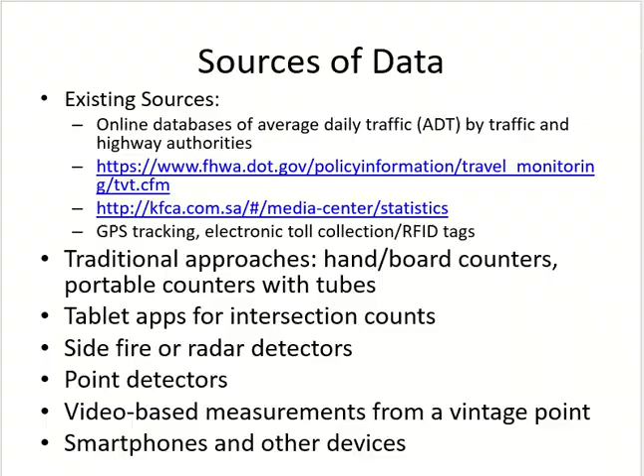If we cannot use one of these approaches, then we have to go in the field and collect traffic data. We can go there and do it manually, or we can put some detectors on the road which will do it for us. Another option is video-based measurement, where you collect a simple video of the highway and later extract the data manually or using software. There are softwares specialized for this.

Where do we use traffic data? For managing the system, for doing future projections, knowing driver behavior, finding out factors which we use in our analysis. Today we will do it for one of them.

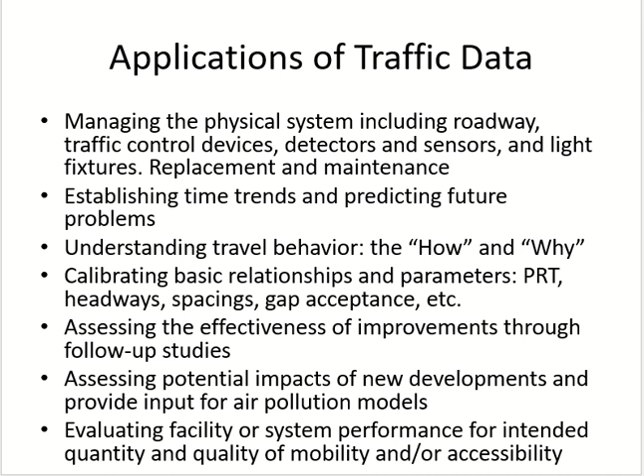Doing follow-up for our changes, finding out the impact of any new development on the traffic, and finding out the current state of the system.

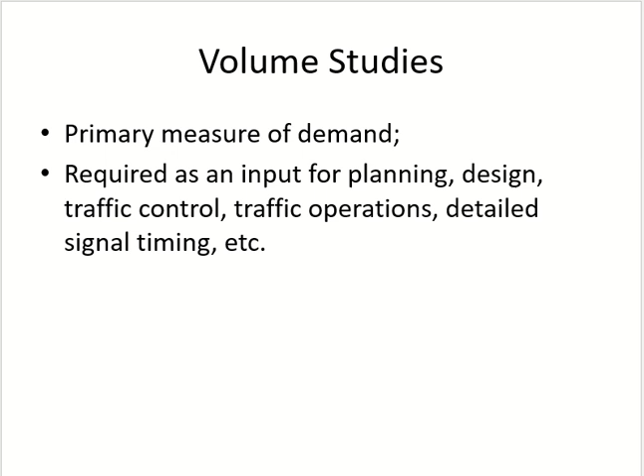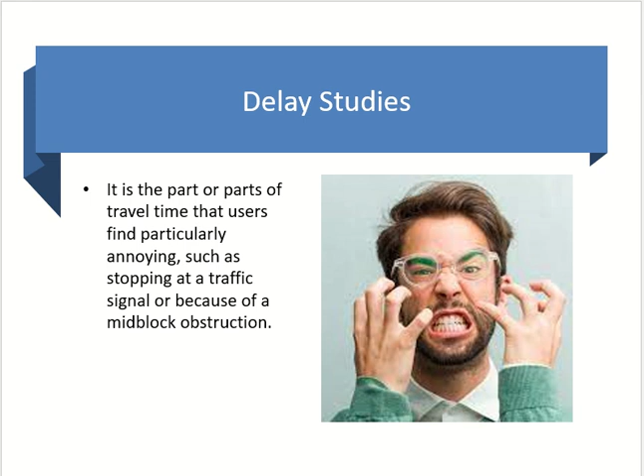These are the types of studies which we discussed very briefly yesterday. Volume is related to demand. Speed is related to safety. Travel time is related to drivers, how they select their route. Delay is how to get people mad. Density is related to driver comfort.

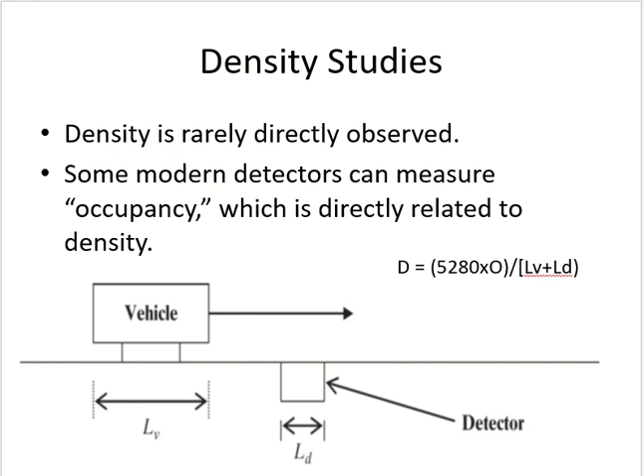We cannot measure density directly, we have to use a detector. In the last chapter we saw some equations in which density can be calculated.

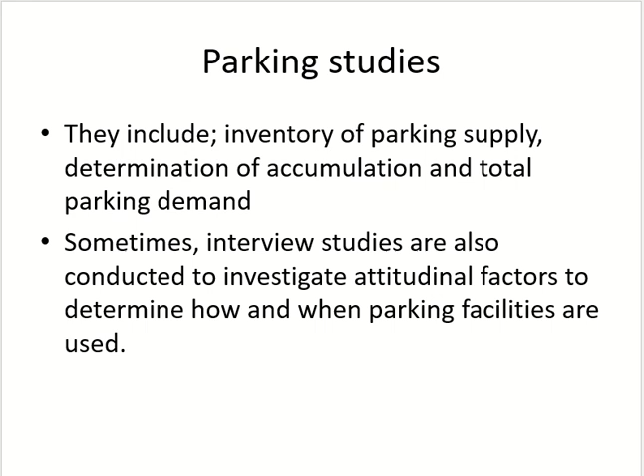Then we have accident studies focused on accidents, and parking studies. One thing I did not mention is that even in parking studies we can do interviews. We can ask people about their choice of location and choice of how they would like to cross the road, pedestrian bridge, or so on and so forth.

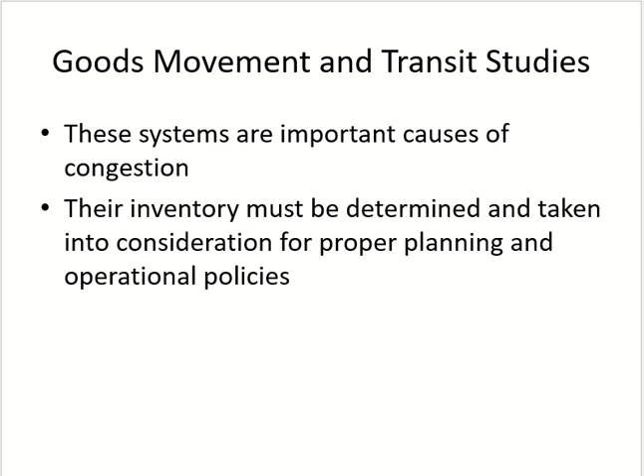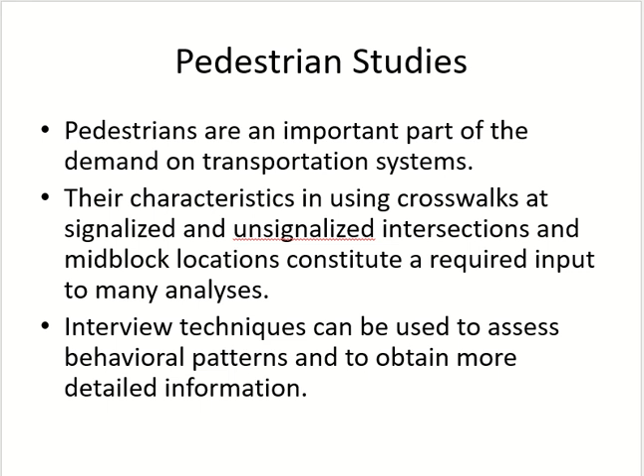The study for heavy vehicles, because they can cause a lot of congestion, which we see normally in industrial areas as well as education areas. Then we have pedestrian studies, and that one was parking studies. Parking studies as well as pedestrian studies include interviews.

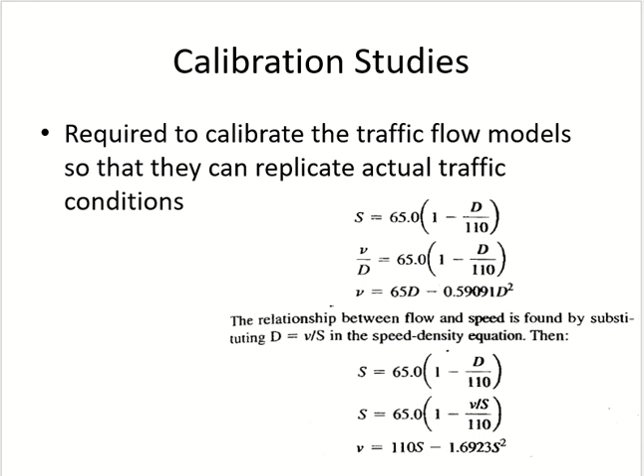We have calibration studies in which we develop new equations, which we did in the last chapter as well. Observational studies is another name for follow-up, where we are following up the changes.

Then we move on to the methods of data collection. We have three types of methods: manual, in which you go and record the data yourself, and the other two involve detectors which will do the recording for you. We're discussing manual methods.

Manual methods have to be shorter, because longer will increase the error and the chances of the person going to the hospital, and you have to keep it to few locations, because more locations means more people.

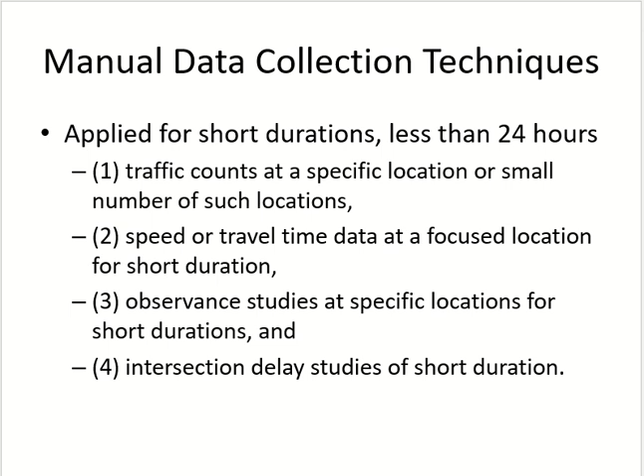What type of studies can you do? You can do counting, you can do speed again connected to travel time, you can do observational studies, follow-up studies, and you can also do intersection delay studies.

We will now discuss manual counting in this chapter, but there are other studies, as I already mentioned, which are done manually, and we will discuss some of them later on.

Here we are discussing manual counting, because manual counting is normally the longest one, so it's more critical and has more problems. Like I told you for the project, you will do the speed for 10 cars, which can be finished in 1 minute. But the counting will be 15 minutes, so counting is related to time and becomes the longest one.

Other studies are usually shorter. But if you want to do any study manually which has a longer duration, the same concept will apply to that study as well. So if you do manual speed studies for longer duration, you have to apply the same concept there as well.

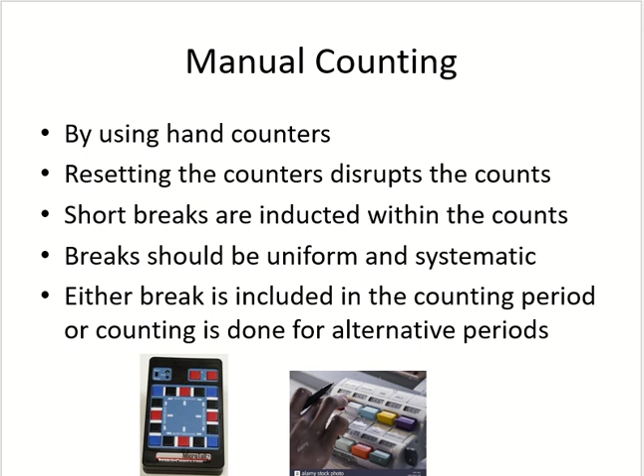Clear? Divide by the number of minutes, multiply by the number of minutes you want. And this is what is written here in this slide as well. But I explain it to you so you understand. It's not an equation which you have to memorize - it's average and cross multiplication. Clear?

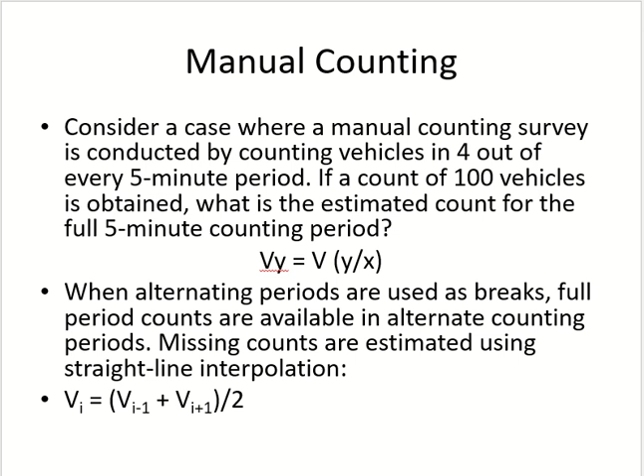No, you will still cry in the exam. At least I can say it was cross multiplication. You will still be looking at the paper. Cross multiplication, yes. This is what happened.

Okay, we have a 4-lane freeway, meaning 2 lanes in each direction. They counted it from 4 to almost 6 p.m. Now you can see the 2 lanes for east and west directions, eastbound and westbound.

Now in each time interval, how many values do you see? In each row, how many values? Not how many columns. How many values? 2, right? In each row there are 2 values, right?

Which means in each time interval they were only counting for 1 lane in one direction. One lane here, one lane there. So they were never counting both lanes together.

Why? What's the reason? The reason is accuracy. When you count lane-wise, vehicles are coming in a sequence - one goes, the next one goes, right? They cannot go together in the same lane. So this increases your accuracy, because vehicles are going one after another.

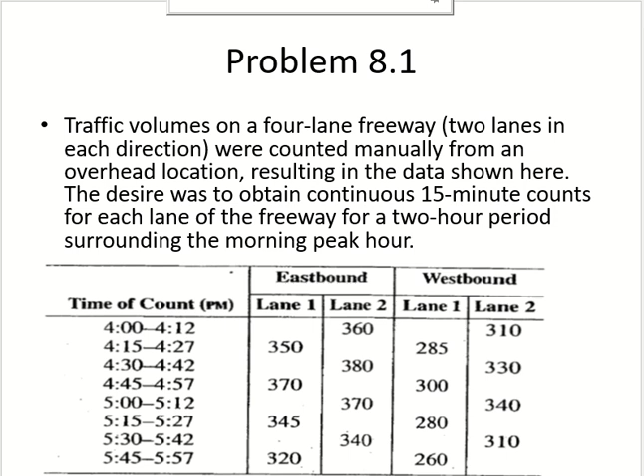So the first thing we need to do in this example is convert the 12-minute counts to 15-minute counts. All these values are 12 minutes, right? We want it to become 15 minutes. So this is the first thing we'll do. Take out your calculators, phones, whatever you use to calculate - you will not bring it in the exam.

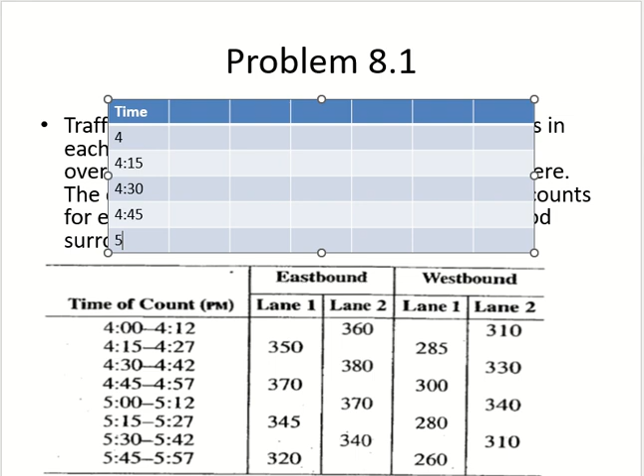Okay, so time 4, then 4:15, then 4:30, 4:45, 5, 5:15, 5:30, 5:45.

Okay, lane 1 for east. Where did I go? Okay, lane 1 for east, lane 2 for east, lane 1 for west, lane 2 for west.

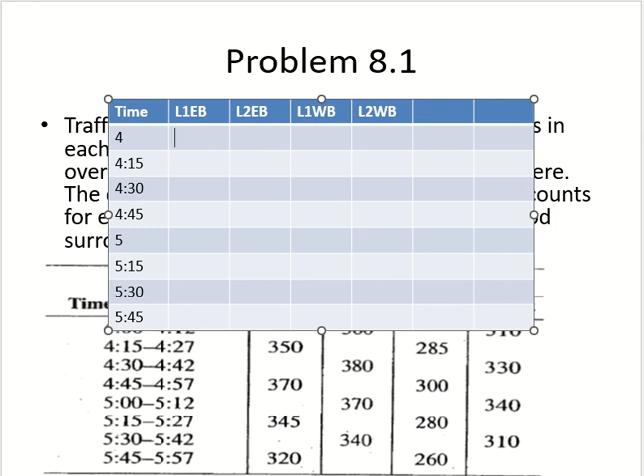So lane 1, the first value is 350, right? The first value is 350, for 12 minutes. So 350 divided by 12, multiplied by 15.

Now you do different lanes. Do different lanes so we finish fast. You are doing lane 1 east, lane 2 east. And what is east and west? Directions. Highway has 2 directions, right? Yes, yes.

438. Where is it? 438, okay. Next. We have to do all, okay?

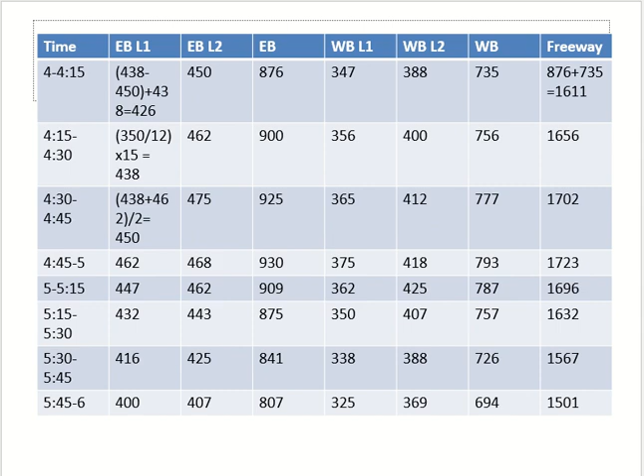Part B: we have to find out the peak hour volume and the peak hour factor for each direction. And what? Freeway. Okay, now what is the freeway? Each direction we know, right? We can see two directions over here. But now what is the freeway?

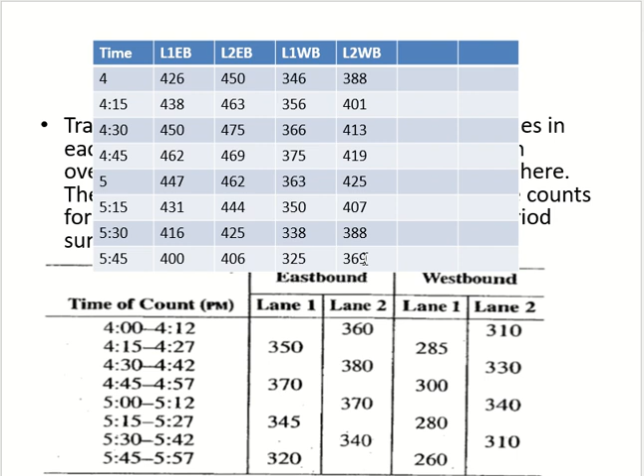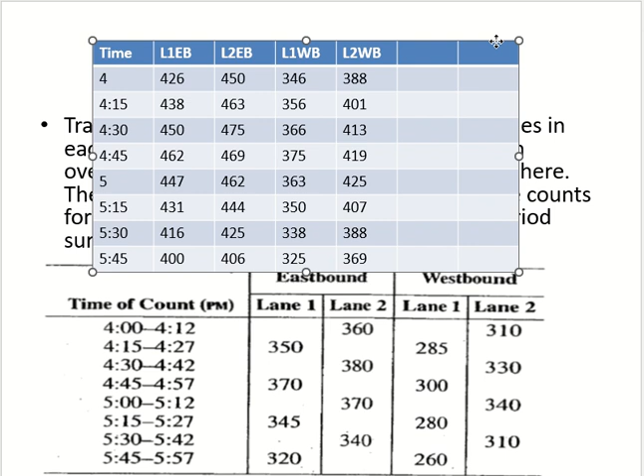Okay, then you need to read the question again. Read the first line: traffic volumes on a 4-lane freeway. So freeway is like the name of the highway. So when they say freeway, that means do it for combined of both directions. Freeway is not something new. So do it for each direction and then combined of both directions. Clear or not? Clear? Everybody?

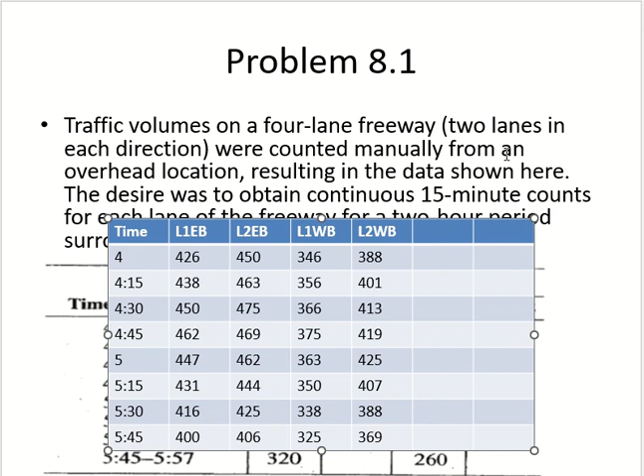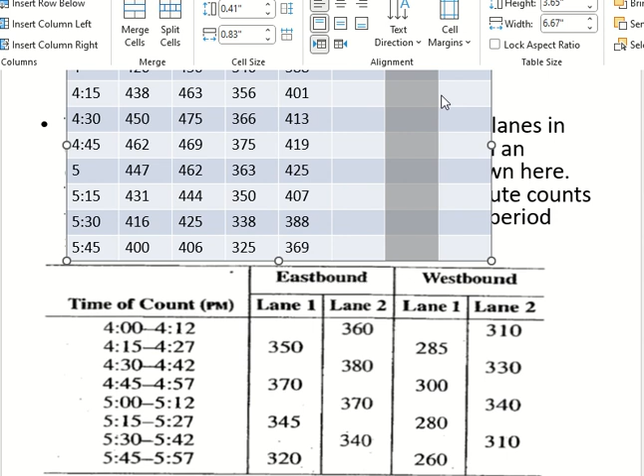Okay, so now for each direction I have two lanes, right? I have eastbound with two lanes, and then I have westbound with two lanes as well. Okay, and then I have the freeway. But understand that the freeway is a combination of both directions. Clear? Okay, so now I come here.

I want the total of eastbound for each interval. So I will take the two lanes and add them together. Okay, tell me.

876. 9. 901. 925, 5. 931? Okay. 909 maybe. 909? It's 75. 841. 800. Okay, we are just adding them together.

Okay, now for west. How much? 800? No, 734. Okay, 734. What did you add? 757. 401 and 356, 757. We are adding these two together. Yeah, next one was what? 779. 794. 788. 757. 721? No, 726. And 325 plus 369. 600 or something. 690 something, yeah, 94.

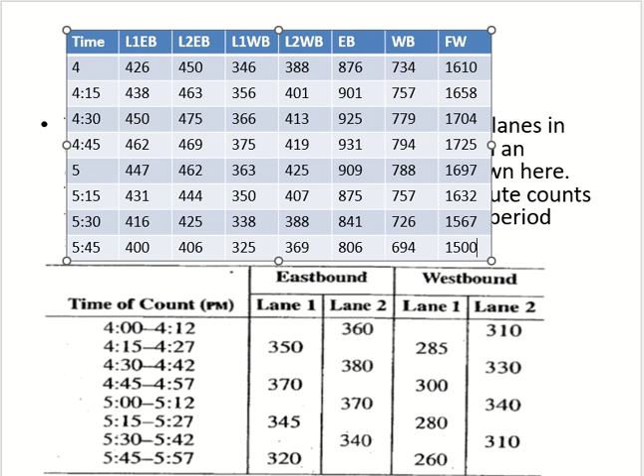Again for each direction and the freeway. If I combine the first 4 values for eastbound from 876 to 931, I am doing it for which time? From 4 to 5, right? How much is that?

3633. 36. Okay, now if I combine the next 4 values, starting from 901, and then the next 4 values up to 909, so I am combining what time now? 901 starts from 4:15, right? Starts from 4:15 and ends at 5:15. Clear? Okay, how much is that? 901 to 909.

Three six six six. You made it yourself? No? Okay. And that was number... 3640.

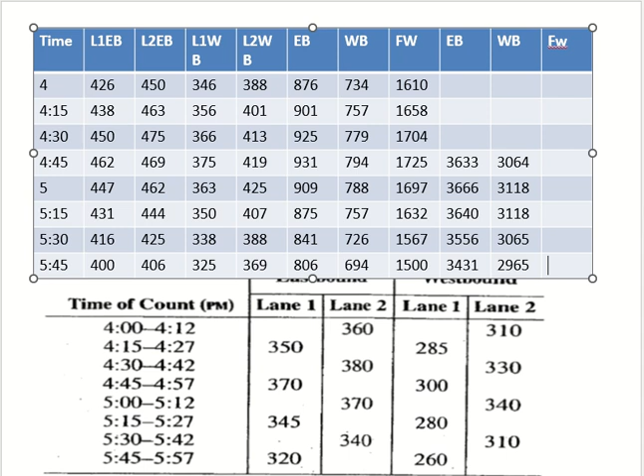Okay, last one. 2965. Now for the freeway, I just add them together, right? Add the directions. How much?

6, 7... huh? 0 0 0. 6, 7. 6784. 6758. Why is this 6700? 64 and 33 will not make 100.

What's that, 6 with 8? 6697. You added the eastbound with the westbound, yeah? Yeah, 3633, ah, 30, okay, 6, okay, 1, okay. What about this one? 3758. 3 what? 21.

Doctor, the one before, wasn't it 3,000? No, it's not 3000, who told you it's 3000? You wrote it. Huh?

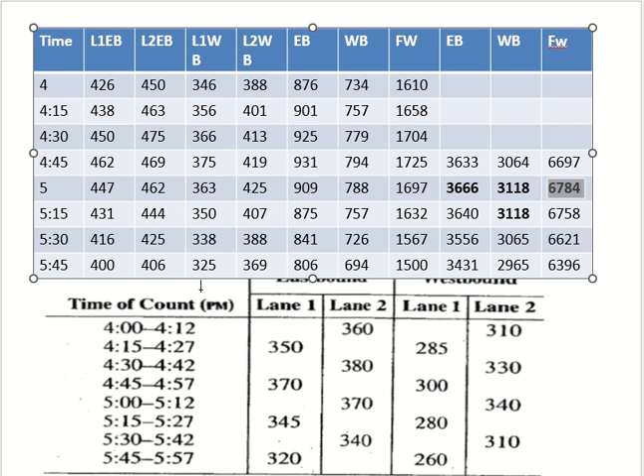Eastbound, 4:15 to 5:15. Okay, clear? Westbound, it could be 4:15 to 5:15. Westbound had two ends, right? 4:15 to 5:15 or 4:30 to 5:30. Okay, any one of them.

Okay, and for the freeway, which value is the highest? 6784, right? Timing? 4:15 to 5:15, right? Okay, anybody have any problem? Clear? Ali? Yeah, clear? Okay.

Now the third thing is the peak hour factor. Peak hour factor is volume divided by 4 times the maximum flow rate of 15 minutes.

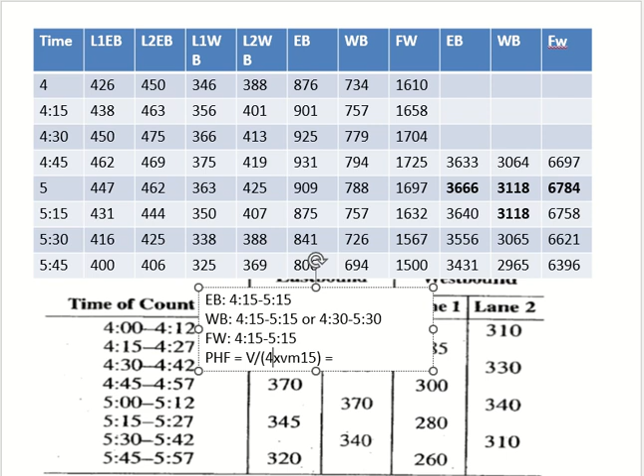So if I look at eastbound, the volume in the peak hour is 3666, right? 4 times this value came from 4:15 to 5:15, right, which is these 4 values. And the maximum is 931.

How much is that? 0.98.

Okay, for westbound, the volume will be 3118. Now what is the maximum 15-minute flow for westbound? We're doing these 4, right? But the maximum was always 794 in both cases, right? That's why I said it will not change my calculation.

794, and this makes up to be how much? 0.98. Okay, for the freeway, now you know how to do it, right?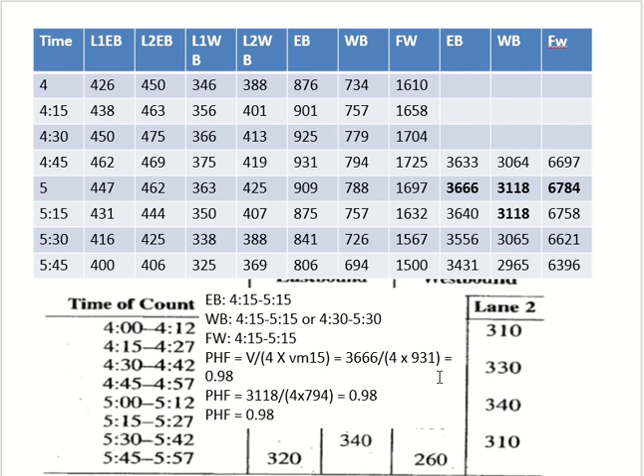What was I saying? Multiply by 4. So to convert this into flow rate, I multiply the value by 4. All values are 15 minutes, so all values will be multiplied by 4. It has already been done. See here.

So 876 was the flow for 15 minutes. Multiply by 4, it becomes the flow rate. 876 multiplied by 4 is 3504. Next one, 901 multiplied by 4. So convert flow of 15 minutes to flow rate of 1 hour by multiplying by 4.

Okay, any questions, any problems? Not till now, right? Okay.